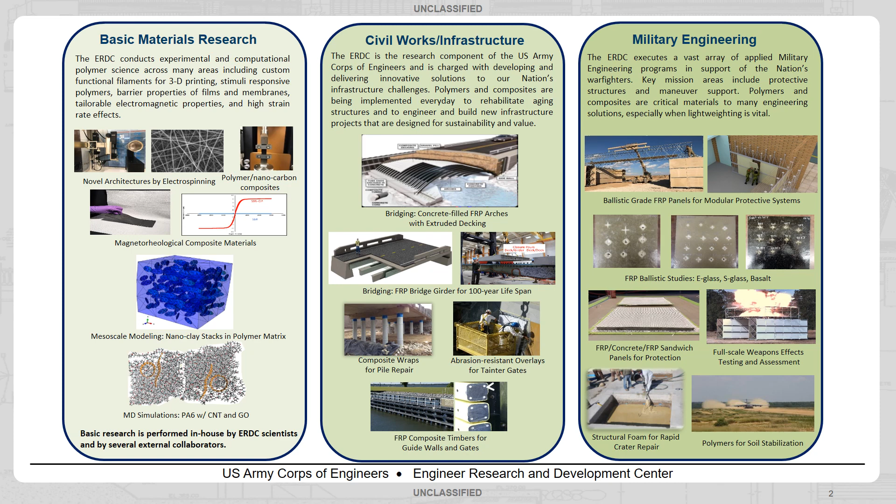And the goal is to use basic research to inform some of this higher level infrastructure and military engineering that we need. So here we're looking at the nanoscale behavior of damage and deformation in polymers to get a better understanding of some of these effects.

So the motivation of this work is the recent advance of nanomaterials and nanotechnologies and the very complex structure property relationships that we see at the nanoscale.

We know nanoscale behavior is highly influenced by things like strain rates, adiabatic and frictional heating, and interactions at free surfaces and interfaces. So we want to investigate some of these mechanisms, things like healing of the polymer at the nanoscale, high strain rate features in front of the shock front, and even more complex features when you introduce things like phase-separated lamella or clusterings, or even look at metamaterials.

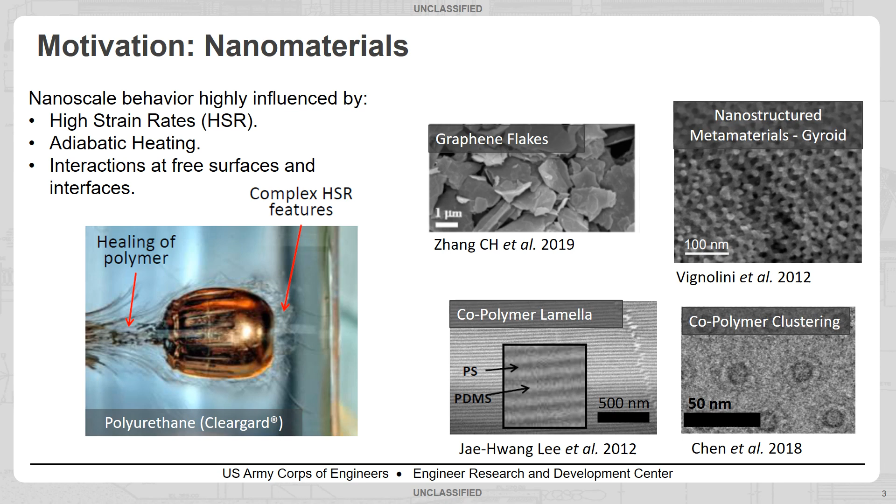All of these have very complex structure property relationships at the nanoscale. So we want to be able to use multiscale modeling in order to investigate some of these effects.

Here we use MD simulations to look at the nanoscale behavior of things like loss of entanglements, bond breaking, damage, and in general just high strain rate mechanisms. We can use that to either inform directly a macroscale model or go through a mesoscale to look at things such as fiber matrix bonding, hard, soft phases, interfaces of crystal amorphous regions.

But the overall goal is to use this information that we gather at nanoscale and mesoscales to bridge the macroscale, either in the form of rate equations or direct coefficients to put in macroscale models, so we can look at more structural things such as ballistic or blast penetrations that we see here.

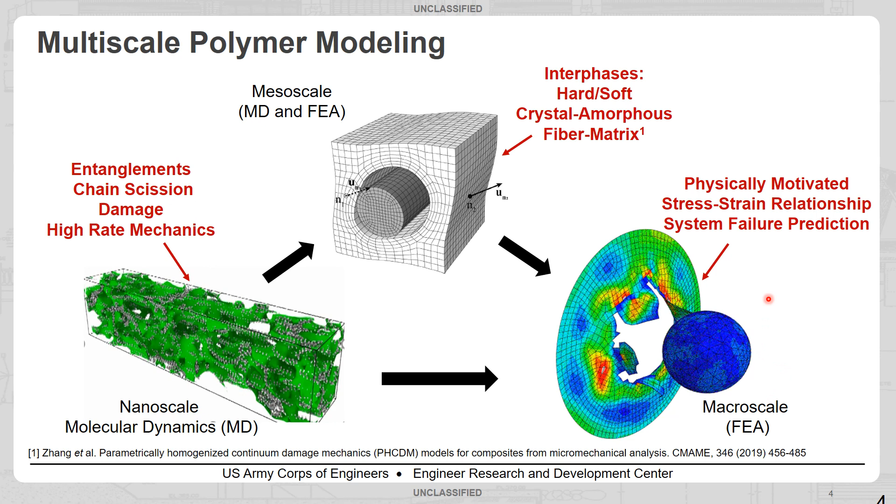So here we have just a generic curve for a polymer. Up here we look at amorphous polyethylene, and as that's deformed, we see the accumulation of free volume or damage within the system. Eventually that leads to disentanglements and bond breaking within the system. All of these are related to each other in complex fashion.

And we want to use this force field called the MEAM, or modified embedded atom method with bond order. And this allows us to have a high accuracy look at free surface formation and bond breaking and bond forming during deformation. So we will take a closer look at that in a second.

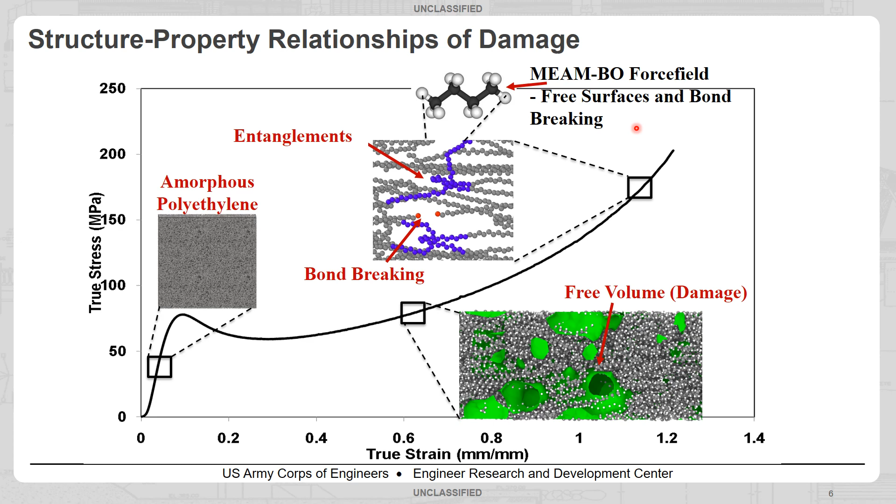So the problem is with some previous molecular dynamics works, they use a united atom model to look at damage in polymers. So here you take your explicit formulation of hydrogen and carbon atoms, you replace it with a single bead, and if you have more complex polymers, you might replace larger polymer segments with a single bead. You connect them via some kind of bead spring potential, and you can look at deformation that way.

It does have some good applications. It reduces the number of atoms in your system, it removes hydrogen atoms so you can take larger time steps, and it has been shown to capture stress strain behavior, or especially yielding, quite well in polymers.

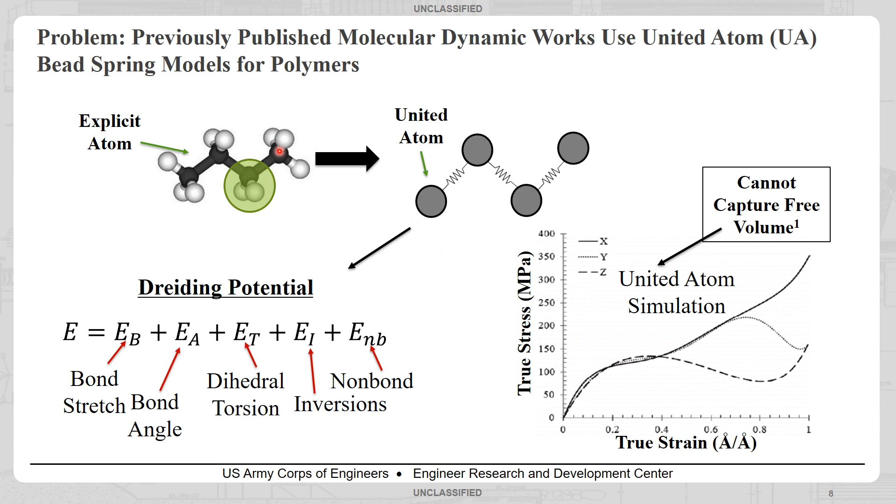So here we show a comparison of explicit to united atom models. We see that the stress strain general shapes are very similar, but the United Atom model does not capture this free volume evolution. It predicts very low free volume, while an explicit atom model seen here would actually predict much higher free volume accumulation or damage in the system.

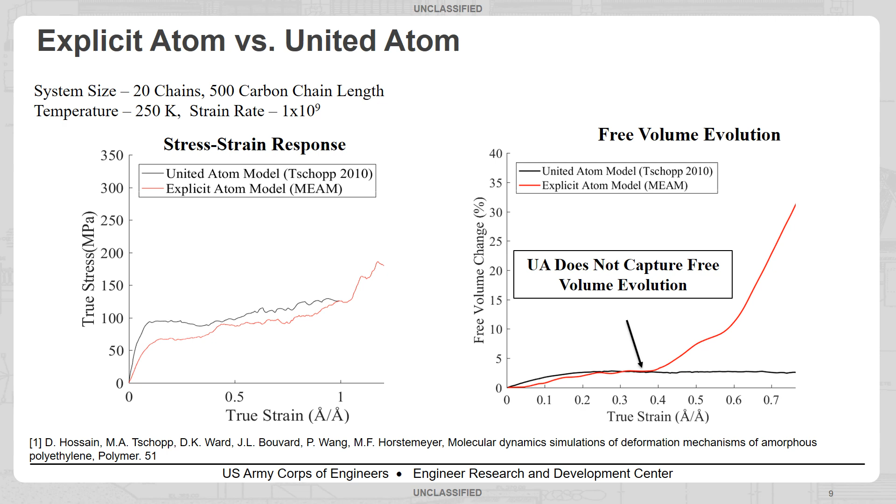So the response then is to use an explicit atom setup, and here we choose our potential to be the modified embedded atom method. If you're familiar with the modified embedded atom method, you know that it started with Mike Baskes in the 80s as the embedded atom method to look at simple metallic structures. It was later modified to add the angular dependence, which then you can look at more complex metals and covalent bonds.

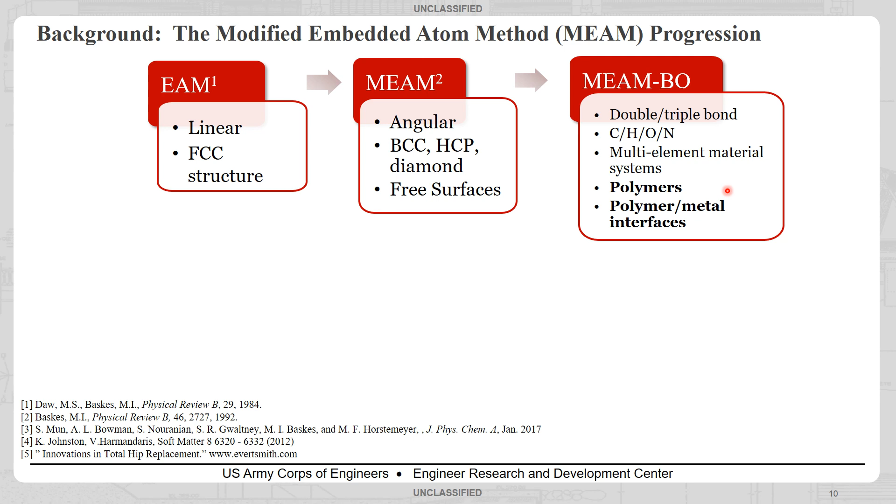And then finally, within the last few years, this bond order component has been added to look at double and triple carbon bonds, oxygen and nitrogen, graphene, materials like that. What's interesting about this is that it will allow us in the future to look at polymer metal interfaces using the same functional form between the two.

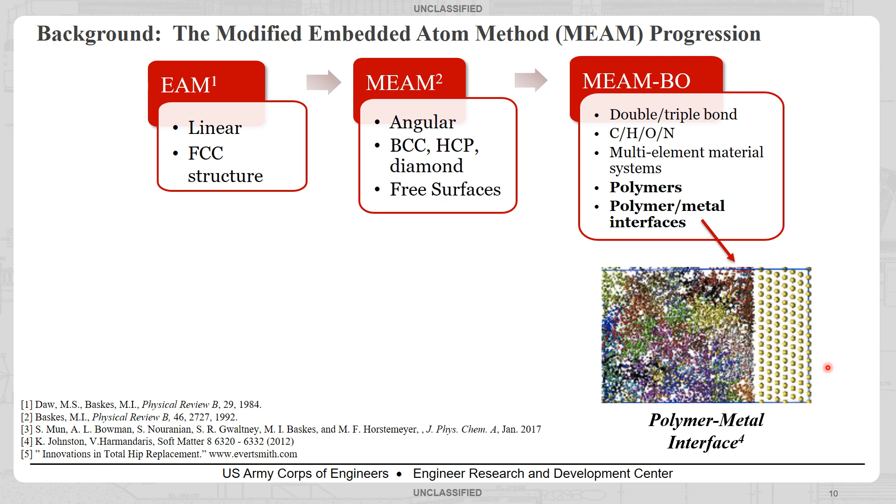So you have a much easier time of parameterizing these potentials. A lot of good metallic potentials already exist. And then we can look at these complex interactions or interfaces between polymers and metals, such as what you see here with this polyethylene liner sandwiched between these two metals.

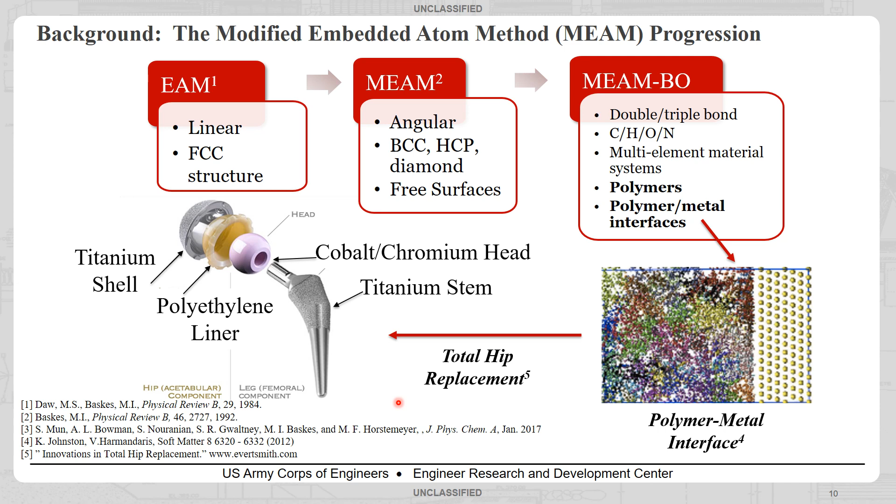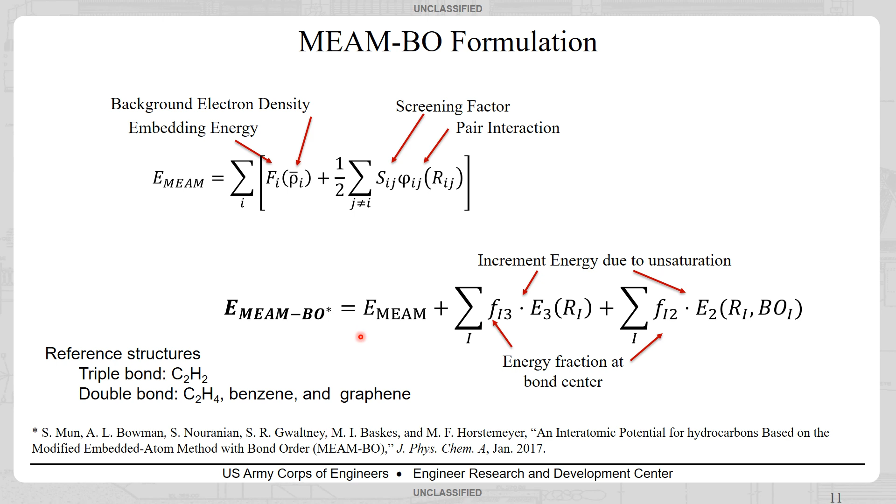So one of the major questions that I want to address here preemptively, that I get almost at every presentation I've done, is how do you bridge MD results to the macroscale? What relevant information, what useful information can we get from these MD simulations that we can use at the macroscale, whether qualitatively or quantitatively, and particularly use them in macroscale models? So the answer is mainly that it depends, and that it's a complex, unsolved problem currently.

So for the macroscale experiment, during deformation, certain heterogeneities, whether they be voids or particles or even just high triaxiality regions, will experience higher levels of strain rates and higher levels of deformation than what the macroscale experiment would. And then the issue is that a mapping or a bridge between the nanoscale and macroscale has not been successfully established. I've seen a few attempts at it, but there's still a lot of uncertainty involved here.

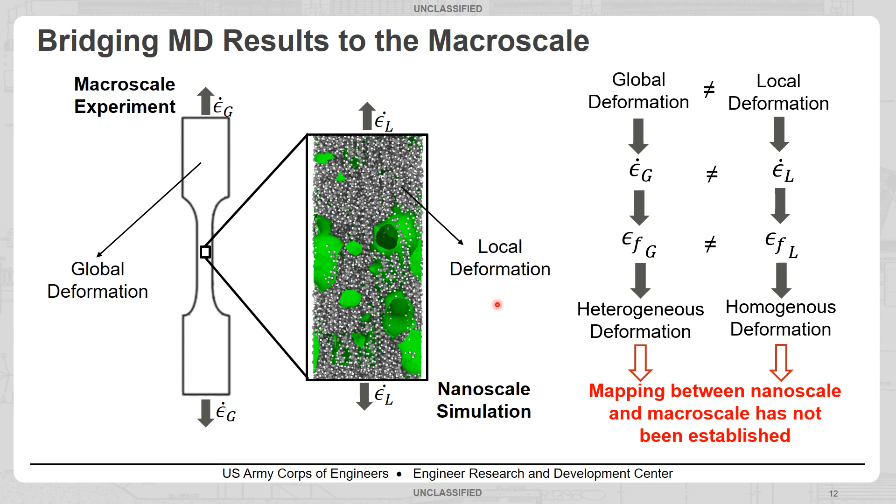But if you're looking at nanoscale structure property relationships or nanoscale mechanics, such as how entanglements disentangle during deformation, how chains align themselves, nanoscale damage, things like that can be used in upscaling mechanisms because these types of strains are seen at the macroscale around these heterogeneities. And especially if you have low strain rate dependence, then you can definitely upscale certain things. So it depends, and you have to be careful on what you upscale to the macroscale when you're looking at these MD simulations.

And both of these could be fit with a model, so having the strain rate, we could then predict what the nucleation rate would be.

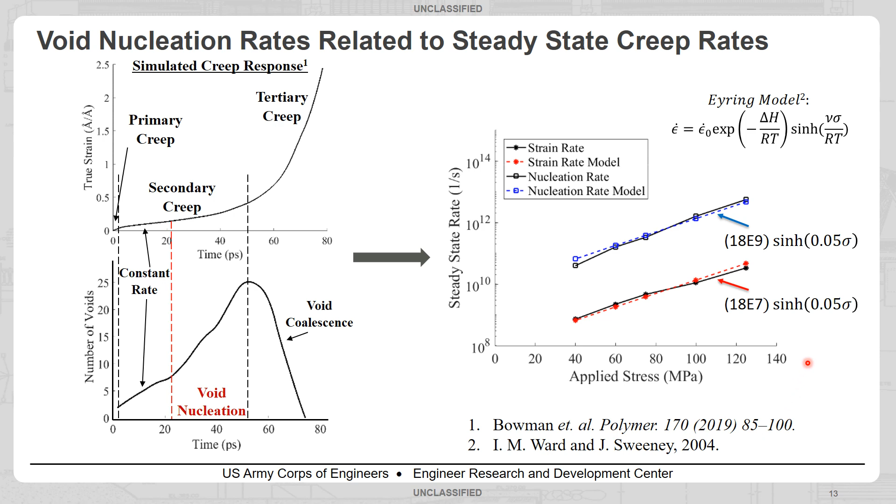We also could show that void nucleation was directly related to structural changes such as disentanglements. So if you're interested in this, please see this 2019 paper that we published in Polymer.

Here it's deformed by just a constant strain rate. So we compare them at the same strain rate and the same temperature, and look at how voids or damage evolve during deformation.

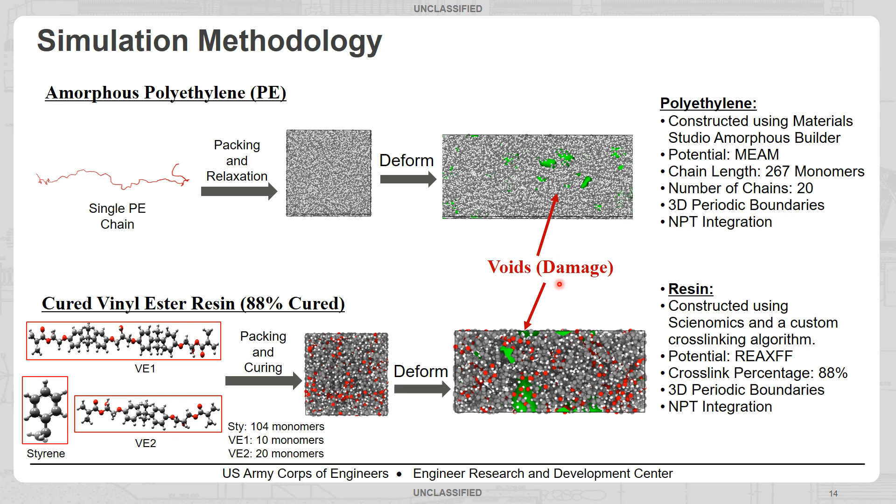So first, we define the void number density, which is equal to the number of voids in the system divided by the volume of the box. So you have voids per unit volume.

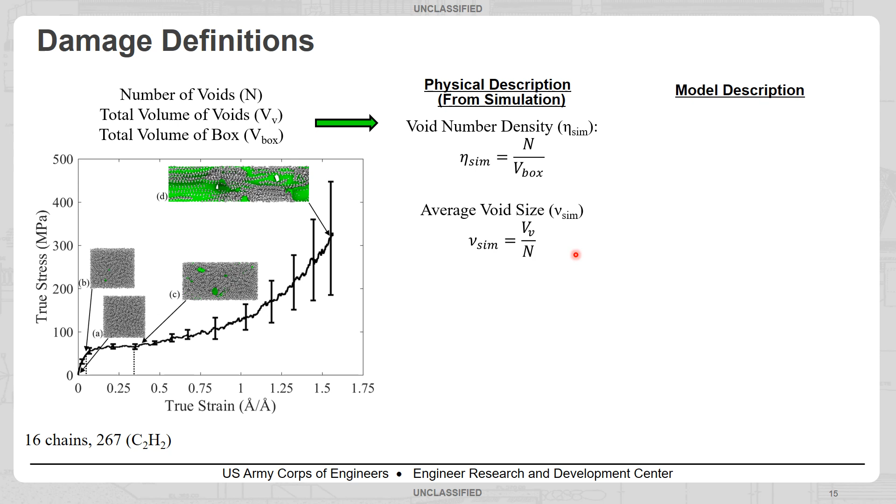Average void size is the total void volume divided by the number of voids. And then finally, void volume fraction, which is the ratio of void volume to solid volume, which is the most important term here for quantifying damage.

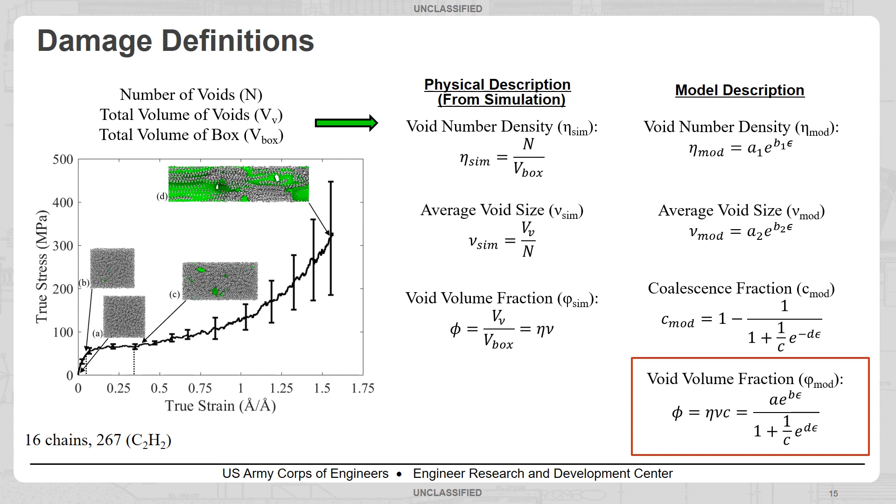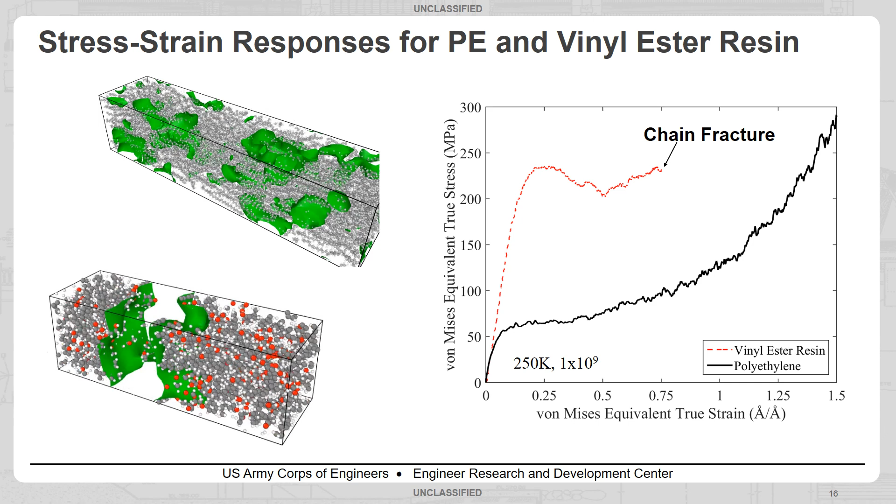So very different failure mechanisms as we would expect, and very different stress strain curves as we would expect. So we do a good job at capturing that phenomenon.

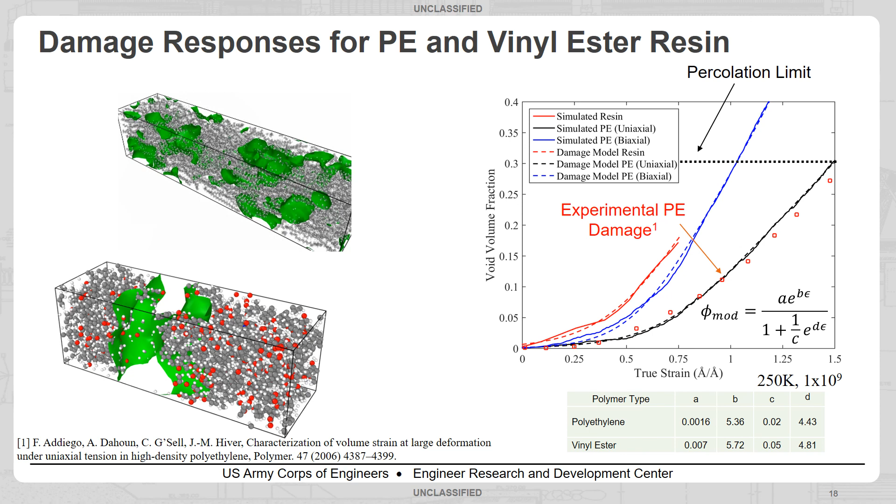So we were quite pleased that our nanoscale simulations could capture this macroscale damage evolution, and we believe that using this model as a bridge from nanoscale damage to macroscale damage is promising, but before we do that, we have to look at the strain rate dependence as mentioned earlier.

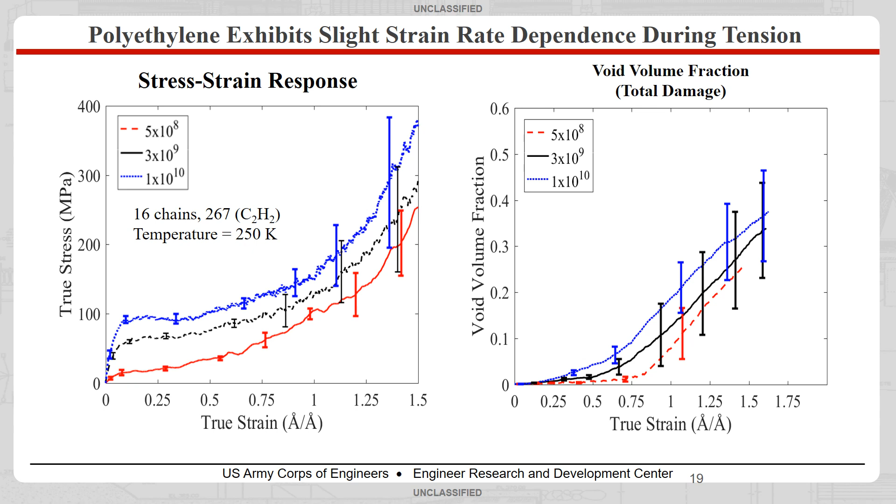So we are able to capture, at different strain rates, very similar void volume fraction evolutions, which all match the experimental results that we saw earlier.

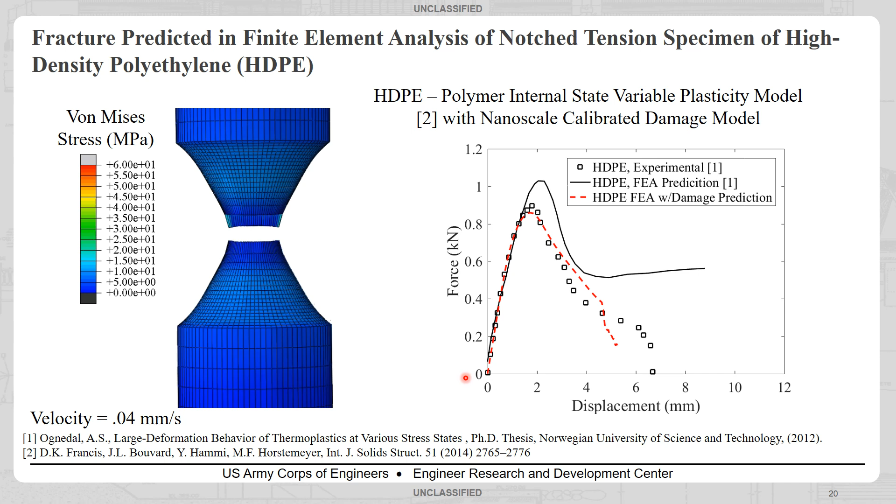We get the failure strain to about 10% accuracy, which is much better than what they predict. What's interesting is that we are able to capture the fracture surface.

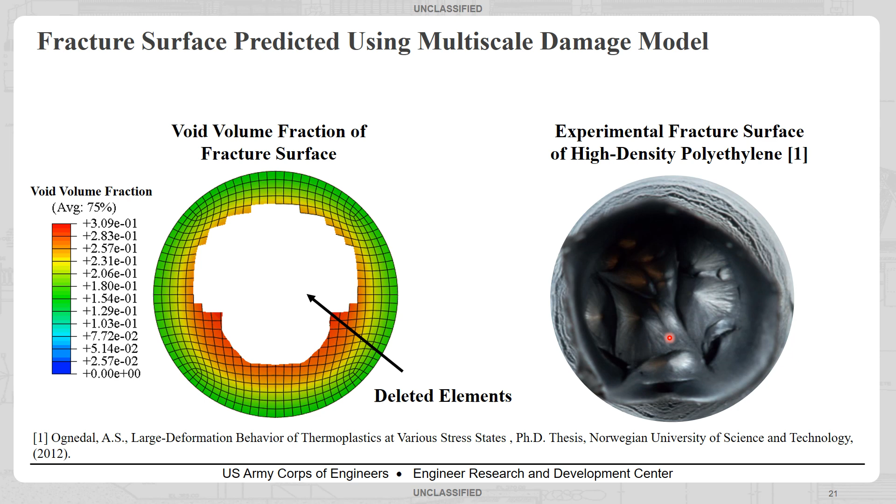So here, this is one snapshot before failure, and we see that due to high stress triaxiality, most of the elements in the centralized region damage or fail first, and then you just have a kind of catastrophic shear-like failure around these outer elements, which is what we see in this experimental fracture surface for polyethylene. You have this area of high stress triaxiality causing lots of void growth, and then you have more of a shear-like failure around the outside.

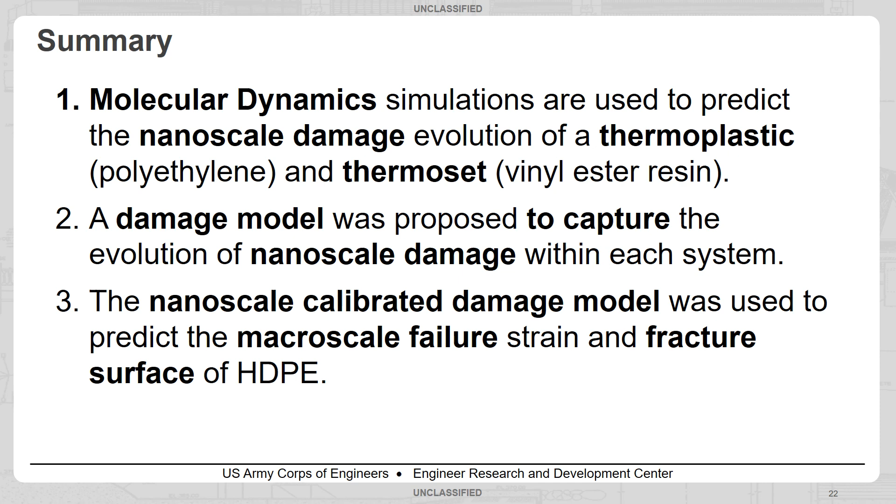The nanoscale calibrated damage model was used to predict the macroscale failure strain and fracture surface in HDPE, and overall this method shows that nanoscale simulations can be used to inform macroscale models.